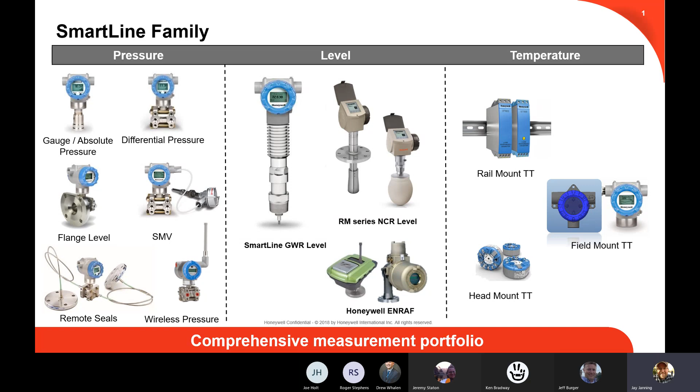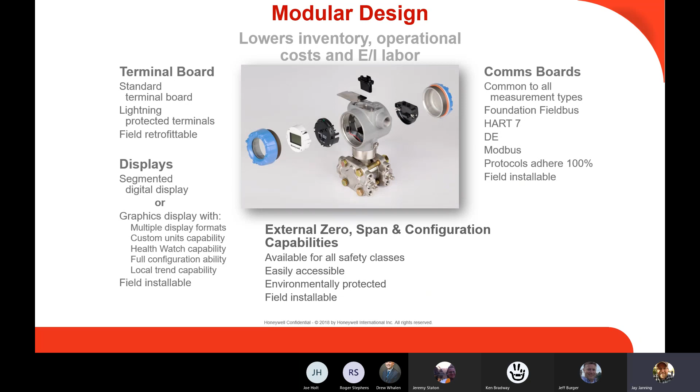So let's talk a little bit about the modular design of the SmartLine transmitters. What you're looking at here is an exploded view of a typical transmitter. The gray portion in the center is kind of the main body of the transmitter. On the right side, the little half circle is the terminal block end for wiring. On the left side, you've got your communication module, that little black disc. And then there's an option for a digital display and then also the viewing cover. The top of it has field configurable buttons, which allow for a zero, span and customer configurations in the field.

Now, one of the best benefits to this modular design is the overall cost savings. Traditionally, you needed to stock one transmitter for each application. Now with the modular design, you can stock one or two models which will cover a wide range of applications, and we'll display some of that a little bit later. Plus having spare components in inventory if something should fail.

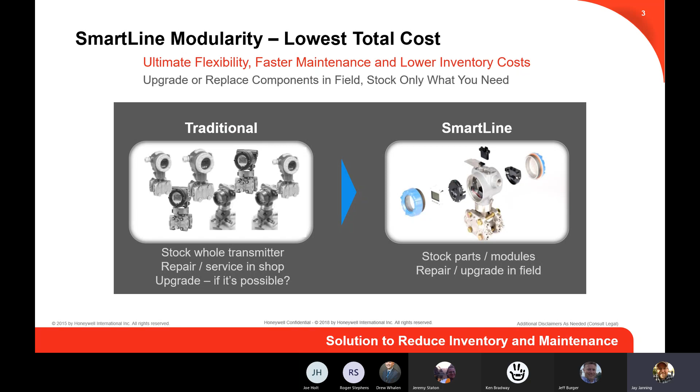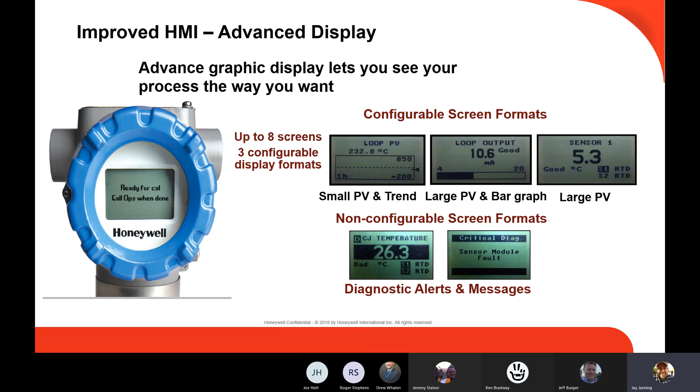So we'll talk about some of these components here. Honeywell's made some improvements on the LCD screen so that you can show what values mean the most to you. It will also display some diagnostic alerts and messages. You can see from the slide here that you can show your process variable. You can show if the output loop is good. You can even show what percentage or what the millivolt or milliamp value is reading.

The three buttons on top, I think this is a great thing that Honeywell came up with. These three little buttons just pop in and out. Keeps the intrinsically safe requirements out in the field. You can work on the transmitters and reset values, do a zero and span without having to interfere with any of the wiring. It's a little separate compartment, and those buttons work on magnets.

You also don't need one set of buttons for each transmitter. In some situations like the refineries that we do a lot of work in, you just need one set of buttons for each maintenance guy that's running around. You can pop those in and pop them back out. Also helps cut down on the expense of having to buy handheld communicators and then worry about keeping those charged and who's got it.

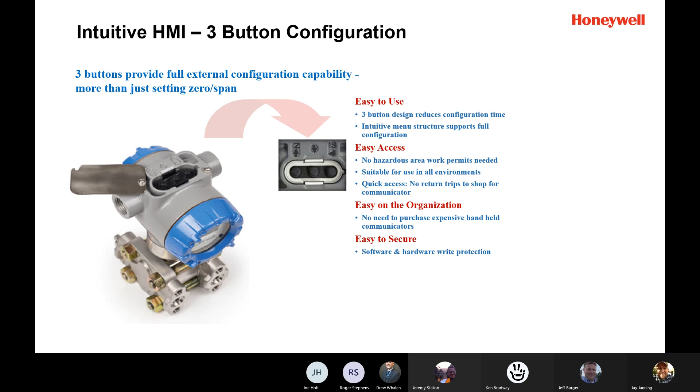One of the best features on the SmartLine transmitters is the wiring puck. It's polarity insensitive, which basically means you can't wire it incorrectly. This comes in handy if the transmitter's in a hard to reach area and you're kind of just wiring it up blind, or you get someone in the field who worries about where the positive and the negative goes.

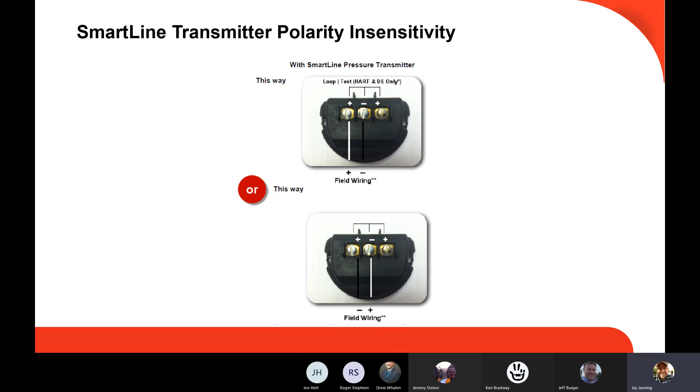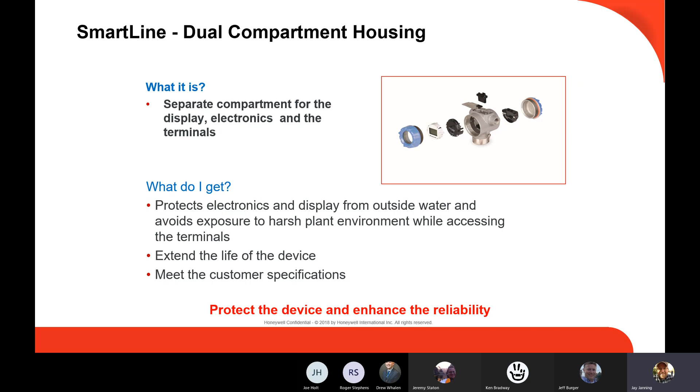A little bit on the dual compartment housing. Why is this important? You can add, remove, and change the 3-button configuration, the communication puck, and the LCD screen without powering down the unit. This can be really important if you have bad communications, but you don't want to take the transmitter offline. You can just unscrew that front viewing cover, pop off the LCD screen display, change out the communication puck, put a brand new one in, and then put it all back together without interfering with the power.

So let's look a little bit specifically at the pressure transmitters. As I mentioned, we've got differential pressure, or the multivariable. You can use the traditional dual block body with vent drains, or you can get it flanged, or even the option for single or double remote seals.

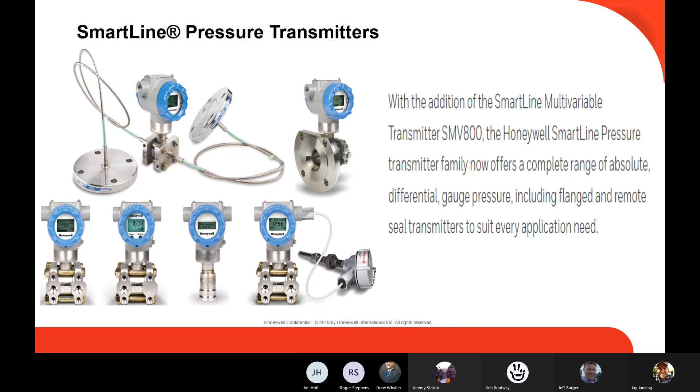Communications from the transmitters, and this carries across all the line of the SmartLine platform, includes the Honeywell DE protocol, HART, or even Fieldbus. There's also options for full compliance with SIL 2 and SIL 3 requirements.

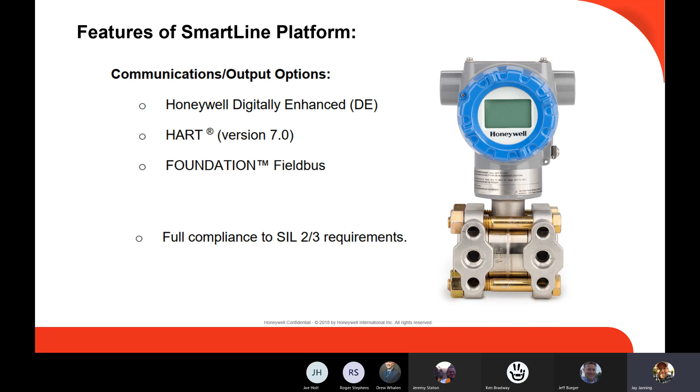So the two main model series here, we'll first highlight the ST700 series. Next, we'll cover the 800 series. So right now, Honeywell leads the industry in stability, which means very little drift, no need to calibrate the transmitter over time, and you can trust the accuracy of the transmitter over long periods.

The chart here kind of shows an example of some of the differential pressure ranges available. What's important to notice here is the turndown ratio, 100 to 1. This means that one transmitter can cover a wide range of applications, which leads back to that same point of the modular design, that you can stock just one model on the shelf instead of having multiple transmitters and then worrying about having the right replacement in a critical application.

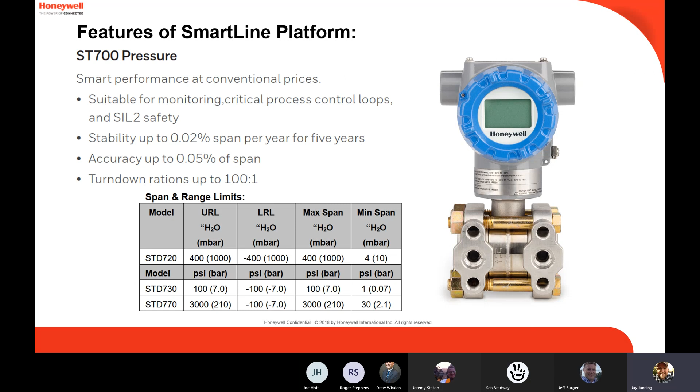The ST800, you can see we've got better stability, better accuracy, and an even higher turndown ratio. Same point as with the 700 series. There's a wide span of upper and lower sensing ranges. And again, these are available in differential pressure, absolute, and gauge.

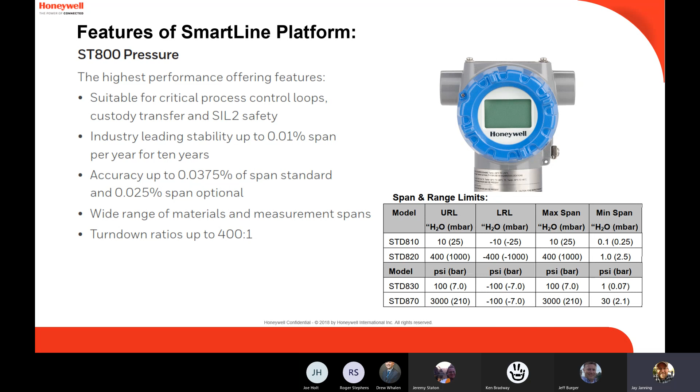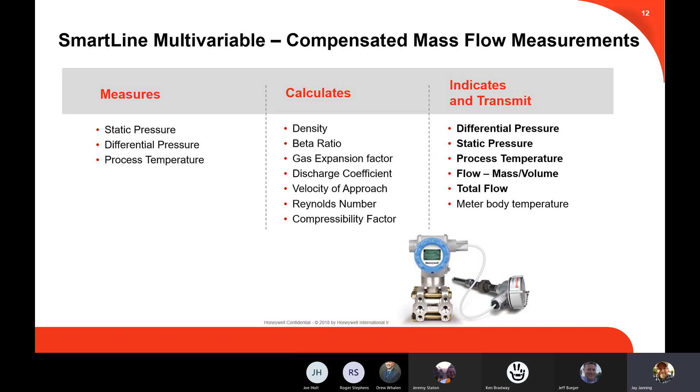So the SmartLine multivariable transmitter measures your static pressure, your differential pressure, and your process temperature. Then it'll make some calculations, and then it will transmit out those measured values as well as a calculated mass flow or total flow. You can see there's multiple applications where this can be used, including liquids, gases, and even steam, with a range of flow elements available.

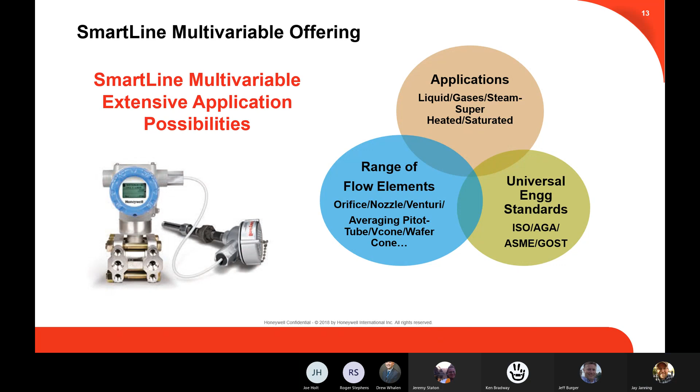And we'll take a look here at the Honeywell wireless solutions. These were first introduced back in 2004, and we can see over the past 16 years the evolution of these wireless transmitters. As you notice, these look just like the normal pressure transmitters now, with the addition of the antenna to broadcast the signal. Some of the improvements made over the years include a longer battery life and a better range.

You can see how often the signal pushes from the transmitter can be adjusted, and you can even push firmware upgrades from your PLC or online out to the transmitter. The way these work is you set up a few receivers around your facility, and this creates a mesh network around your plant. And then adding in extra transmitters is just as simple as putting in the transmitter, and it automatically finds the quickest path using that mesh network. So once you get over that initial installation cost of the receivers, popping in transmitters is a piece of cake.

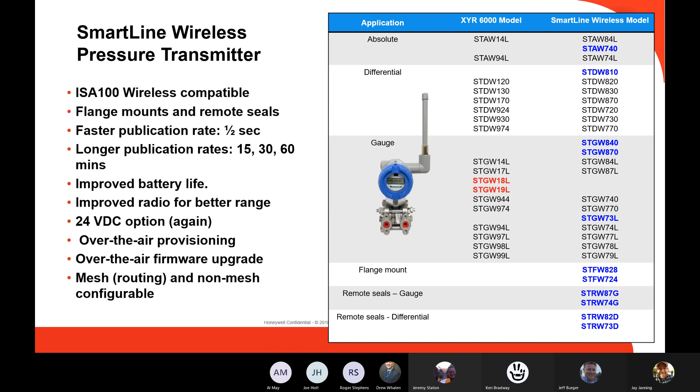All right, we'll talk about level transmitters here. The right transmitter will depend greatly upon the application, whether it's guided wave radar, non-contact, or even the traditional differential pressure transmitters. You have the same accuracy and response time as the rest of the SmartLine family. There's even level transmitters for tank levels where custody transfer level is required for accuracy in measuring how much liquid is being transferred in between customers.

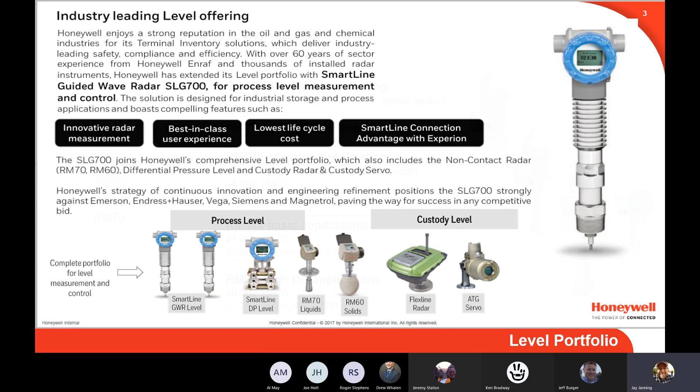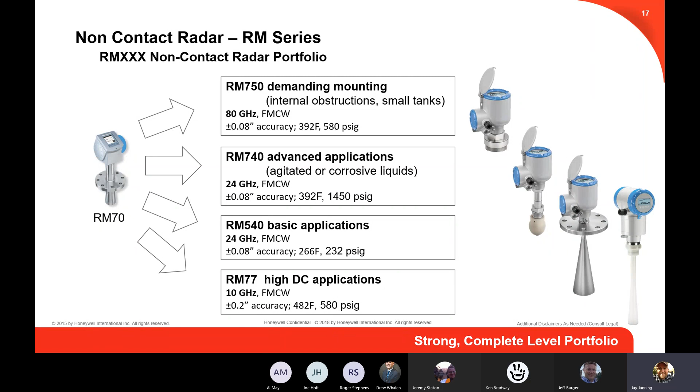Here's a look too at some of the different mounting options that are available for the non-contact radar transmitters. And again, the right fit and the right mounting will depend greatly on your application. Same with the pressure transmitters. You get that high level of accuracy with Honeywell. Various ranges, flanged or threaded connections are available, and different materials of construction, depending on if you have corrosive environments.

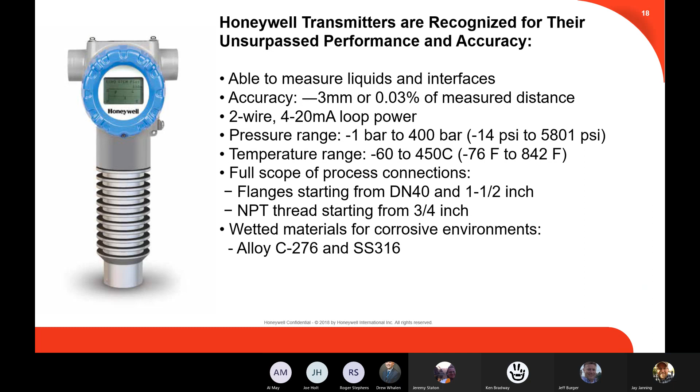And because it has that same design head as the other transmitters, you have the option for the 3-button field calibration, the LCD display screen, and even the SIL 2 and SIL 3 compliance.

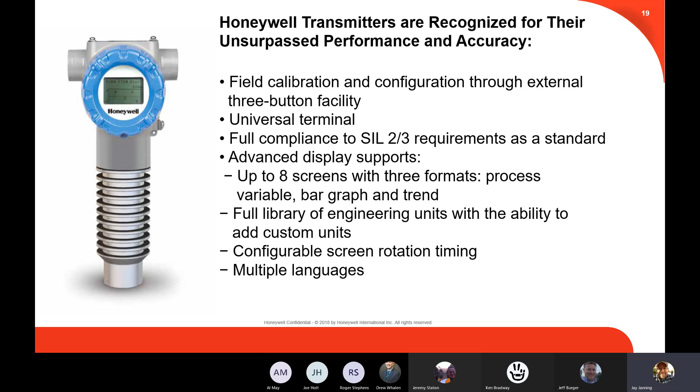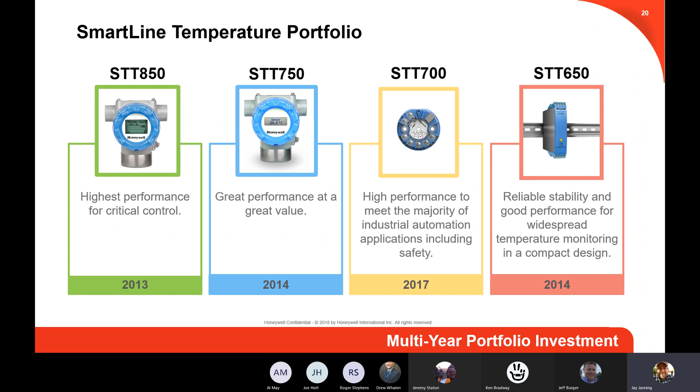Temperature transmitters. With these, you have the same options as the field mounted in the STT 800 and 700 series. Again, similar to the pressure transmitters, you're going to get a high level of accuracy and low drift with the 700 series, but you'll see an even higher range of accuracy with the 800 series. And then there's also the option for the DIN rail mounted that can be put inside of a cabinet or a panel. They're supported by both DE and HART protocol, and certification options are available.

Newly released with Honeywell is the updated remote indicators. These are an updated version of the old RMA 300 series. It's now the RMA 800 series. These are great if you have transmitters in a hard to view location up high and near a ceiling, and you need to retransmit the process variable to a place where it can be seen without climbing on top of equipment or squeezing into a hard place to reach.

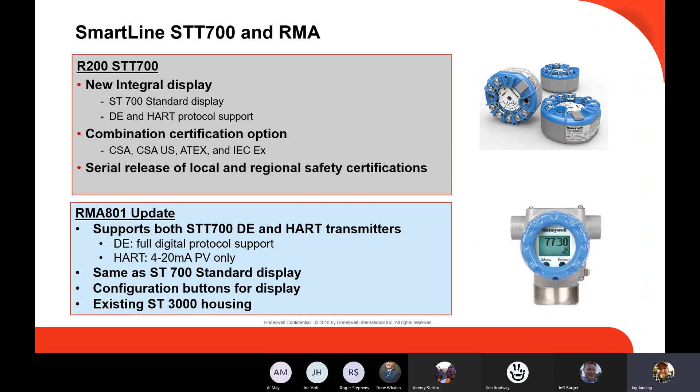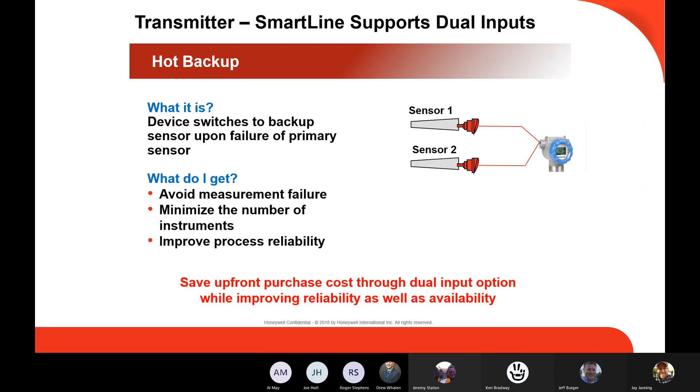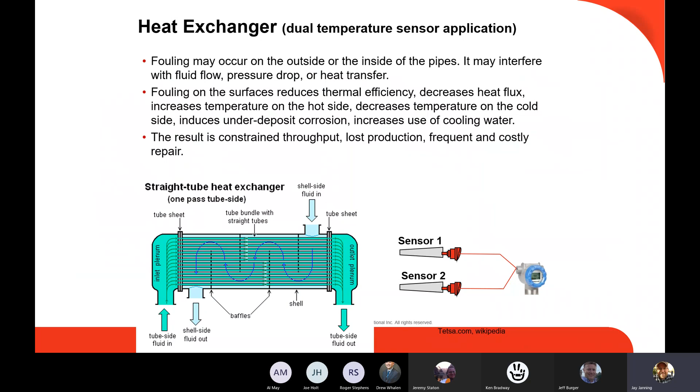So a kind of interesting and valuable feature in the SmartLine temperature transmitters is they support a dual input. So in this example, you can have a ready-to-go backup in a critical application if one of your sensing elements or thermocouples fail. In this example of a heat exchanger, you can measure the temperature at 2 different points. This can also help provide an early warning that fouling is occurring inside the heat exchanger if you get too much of a temperature difference between the 2 points that you're measuring.

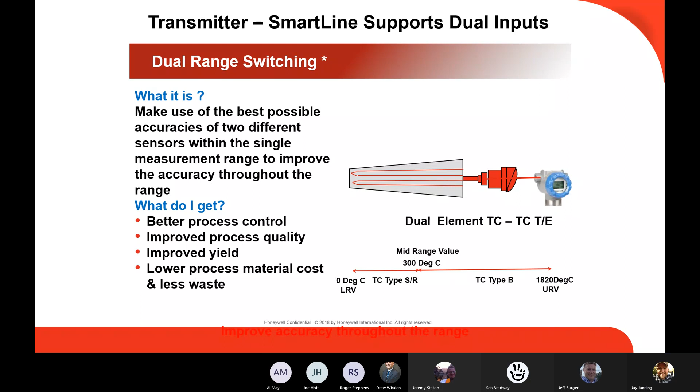And in any of those examples I just covered, you can set up a sensor drift alert that lets you know when the temperature difference has reached a critical point in your application. This can also be an early warning sign that one of your thermocouples or sensing elements is beginning to fail, or maybe there's something going on in your process that needs some attention.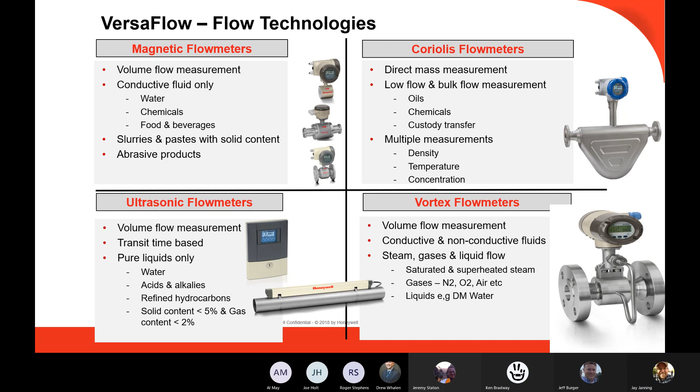And oh, let's see, did this one, oh, there we go. Okay, got to click a couple times here to get it in.

Sorry about that. So finally, the last thing I want to cover here is the Honeywell AVT, or the application and validation tool. This is a great free online resource provided by Honeywell. What this does basically is it allows you to go in online and pick which type of transmitter you're looking for, whether it's level, pressure, flow, temperature, or multivariable. And then it kind of steps you through the process of picking what exactly is going to be right for your application.

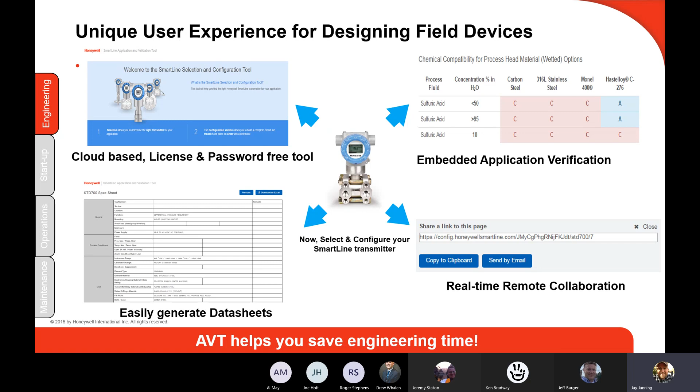A lot of smarts and a lot of programming is put into this. It gives you all the options instead of dealing with the model selection guide. What this is going to help you do is cut down on specification time. It'll help reduce errors because it won't let you pick a transmitter that can't be selected. And then when it's all done, it gives you that full model number that you're able to link with anyone else in your organization. You can send that off to your favorite distributor, and that allows us to help you fine-tune your application.

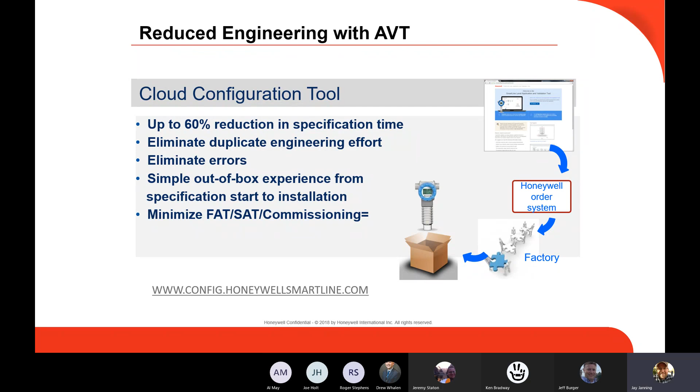And with that, I'll turn it back over to you, Jeff. All right, Jay, thanks for the overview. Did a great job. Just a real quick summary on the SmartLine.

Honeywell has been in smart transmitter technology for ages now, and throughout the years they've really refined this product line. One of the things they did really well with this last transmitter line was, like Jay said, the modularity of the transmitter head design, where it doesn't matter if it's a temperature transmitter, flow, pressure, level, they all carry the same modular head design, with common parts like the display, the DE/HART module, the wiring puck, and this should eliminate a lot of headaches for customers out in the plant who might have to carry spare parts.

It also helps with the distribution channel at Honeywell, so we can carry all those spare parts on our shelf. So if a customer needs to add something out in the field or add a part off the shelf, we can do that. And with the modular design we're able to put together a specific model for the customer, ship it off our shelf, and do some really quick deliveries.

I think the other really important thing that Jay mentioned is the high turndown ratio. Back in the days when Honeywell had the Series 100 and Series 900, there were a lot of different models for different pressure ranges. The fact that the new model has such a high turndown ratio minimizes the stocking that customers have to do on their shelf for spare parts, because now there's a wider range of pressure ranges that the transmitter can handle.